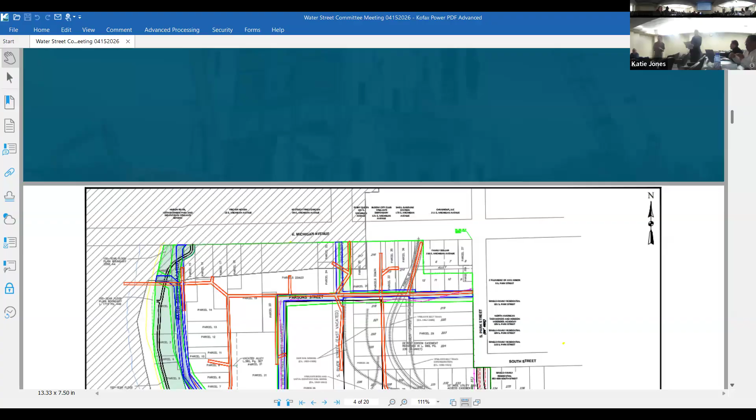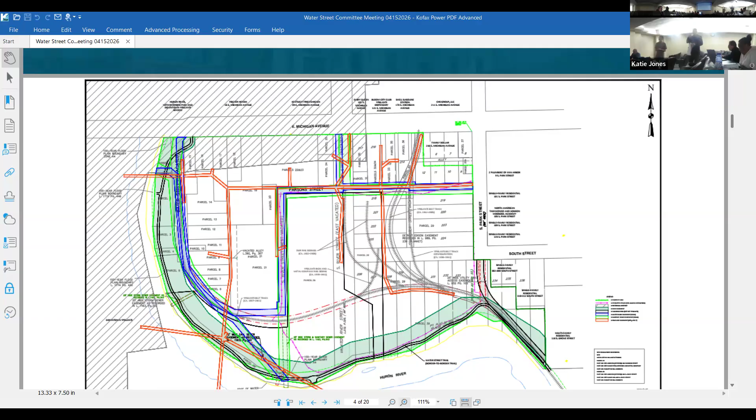I'll skip ahead a couple. The first set of maps is about the existing conditions at the site. We all know the site's not developed right now, but it had previously been developed since at least the 1880s up until 2010. So there are certain infrastructure features that are still on site related to past use of the site.

I guess we'll start with the park easement, along the river. That is a 100-foot wide easement that includes the portion of the Border-to-Border Trail that goes through Water Street. It's the big, green thing at the bottom. It's the city's intent to retain ownership of the park easement, so it's not going to be part of the development area. It's about 6 to 7 acres in size. The current parcel for Water Street is about 37 acres, so the redevelopment area at Water Street is actually about 30 acres.

The other things you see on this map are both above ground and underground easements. On the projector, the easiest thing to see is the blue, that's a water main easement that crosses the site. It tends to follow old street rights of way that have since been vacated. In a similar location, there's also a sanitary sewer easement, shown in a different shade of green, and the park easement. Up in Parsons Street, the depth of the sewer easement is about 20 feet underground, so it's quite deep, pretty well integrated into the site.

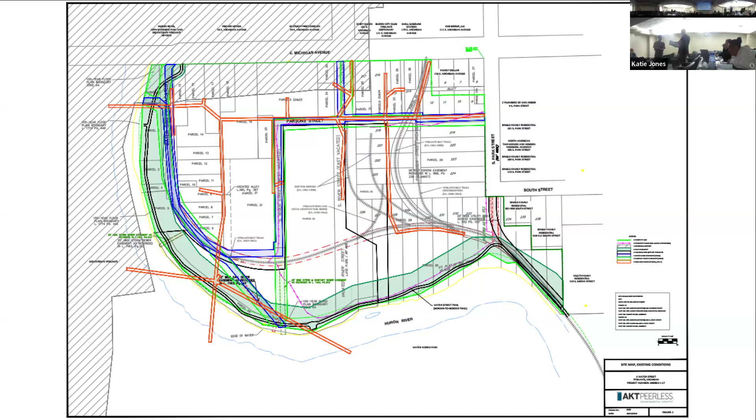There's another question: is there any evidence of buried storage tanks in any of these parcels? Yes, there have been storage tanks encountered on multiple parcels. I believe a storage tank was identified on parcel one in connection with demolition of the former structure there. Parcel 16 had a bunch of tanks on it. But to answer your question, yes, there have been a lot of storage tanks.

I think we've done that, yep.

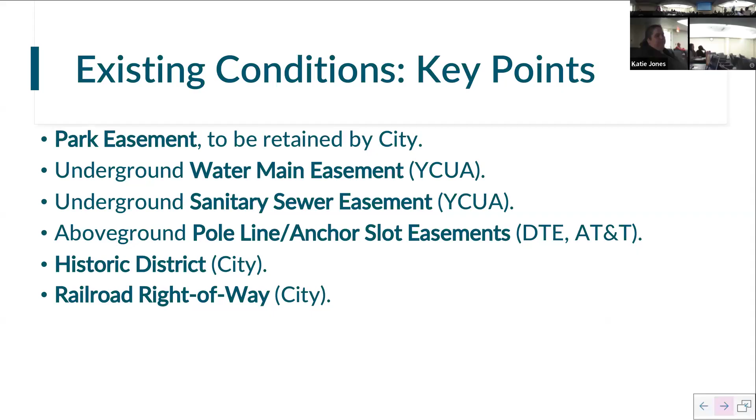So the question earlier about the significance of the former parcels, it's difficult to see on the projector, but on the ground, that form map you have in front of you is a different version of that map. When the city went to acquire the Water Street redevelopment area, those 39 or 40 different parcels, the city did its own due diligence, phase ones and phase twos on most of the parcels, based on the historical use.

Everything shaded brown or light brown is called a Part 201 facility, a site of environmental contamination. The city went to phase one, then phase twos, identified contamination, and filed a baseline environmental assessment. Subsequent work identified additional contamination on different parcels that also meet this definition of a Part 201 facility - those are the tan shaded parcels. Then parcel 16 up along Michigan Ave is shaded red. That's a Part 213 property, or a leaking underground storage tank site.

So to your question a moment ago, multiple underground storage tanks were removed from parcel 16. A cleanup was conducted, called the BTEX area, back in 2004. The intent of that cleanup was to remove highly concentrated petroleum contamination, in the interest of simplifying soil management decisions for a prospective developer at the time. It wasn't done through Part 213, it was done under Part 201, which is environmental contamination, whereas 213 is underground storage tanks.

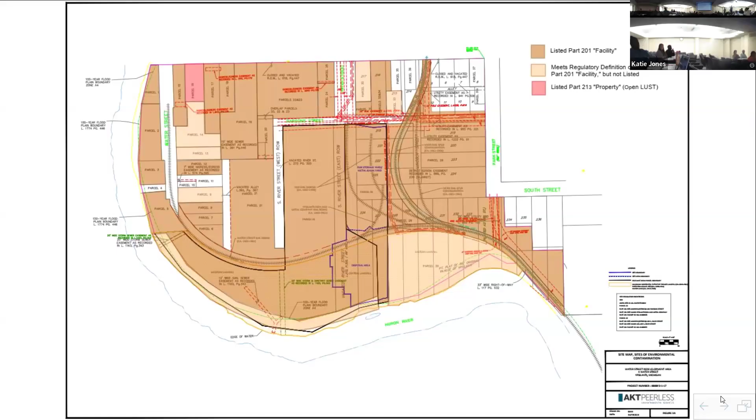But generally, back to this map, it's just intended to demonstrate the whole site. It's essentially a Part 201 facility, so a developer will have soil management obligations, and for the end use to take care of.

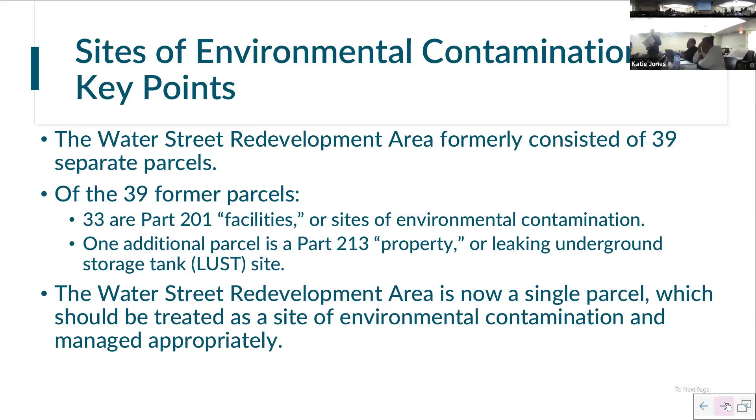To go slightly deeper, the soil management means developers would not just excavate for foundations in a normal fashion - they'd have to do constant testing, even though some has been remediated. They have to be paying attention because of course you didn't remediate it 100%, and you don't know where they're going to be digging. As they dig stuff up, it could still be contaminated. Does that not slow them down?

The site is likely going to be regraded as part of the redevelopment. The whole site is contaminated. Multiple cleanups have been done at the site to get rid of the worst of the worst.

And what I was alluding to earlier with respect to simplifying soil management decisions - early on, the first proposed redevelopment, say in the early 2000s, when a developer goes to do what they're going to do, it becomes cumbersome if we have to treat different areas differently. We don't want to spread very high levels of contamination into areas that are less contaminated, so that's why some of those cleanup activities were conducted. Generally speaking, on a contaminated site, if the contamination across the site is relatively similar, there's really no restriction against moving dirt around within the facility footprint.

How deep can you move the soil in? It depends on what you want to do with this. Activities that disturb the soil, any building that gets put in there could go to either virgin soil, that is undisturbed, or down into where many of these contaminants go. The developer needs to know what foundation solutions make sense, and therefore what soil he's displacing, and whether he's testing soil, because he's displacing contaminated soil that was left on the ground. But you get the point.

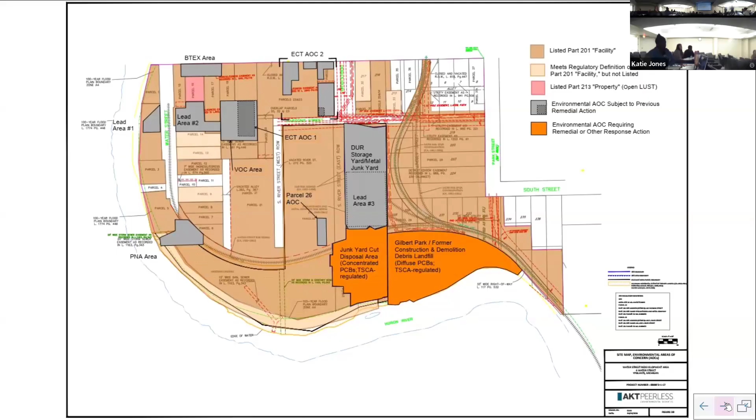For clarification, as I understand it, all the areas from that soil—there's not a restriction for mixing that. But if you get into the gray areas, you need to keep the soils within the boundaries of those areas. Sorry, it's actually kind of the opposite.

The gray areas are areas that have been cleaned up—excavations where clean engineered fill has been put back. So what you wouldn't want the developer to do is take soil from the brown areas and move it to the gray areas, at least without putting plastic sheeting down underneath it, because those gray areas are now backfilled with clean material.

To zoom out a bit, a developer should have a good, solid environmental construction management plan about what they can, or what they should or shouldn't do with their concept.

One slightly complicating issue not shown on the maps yet is there are low-level PCBs on certain parts of the site. They're not TSCA regulated, so it's a Part 201 issue, and we're still working through the data to make a recommendation. Parcel 26 was an auto parts manufacturing facility at one point. There are low-level PCBs, maybe related to transformers used on site, or maybe related to oil used as a dust suppressant on an unpaved parking lot back in the day. They are well below 50 parts per million, but some spots may have PCBs above 4 parts per million, which is the state's direct contact cleanup criterion.

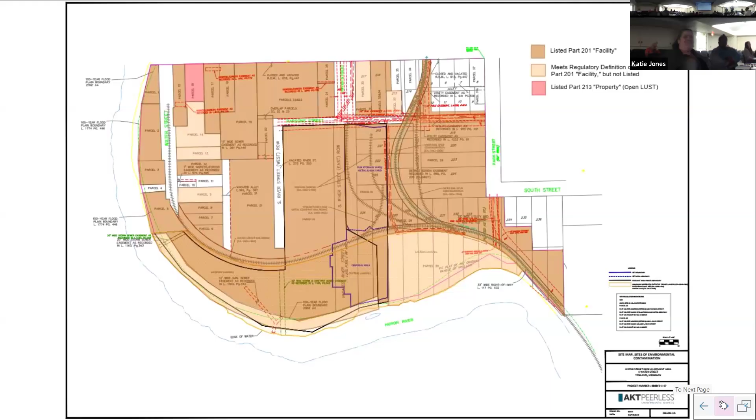Another thing we want to let developers know is this site formerly had more than 100 buildings on it, mostly north of the rail. All those structures have been demolished. Some of those structures had heating oil tanks underground, some had petroleum tanks underground, and some had petroleum tanks above ground. There are old fire insurance maps that depict water cisterns under some of the streets.

When a developer digs into a brownfield site like this, they are going to find foundations, footings, tanks, abandoned utilities, cisterns, and additional pockets of contamination that were not previously identified. So a developer needs to have experience working on these kinds of sites so they know how to handle those kinds of things when they encounter them.

It's gonna happen. Yes, it is. Yeah. What's that? What about? Oh yeah, thanks.

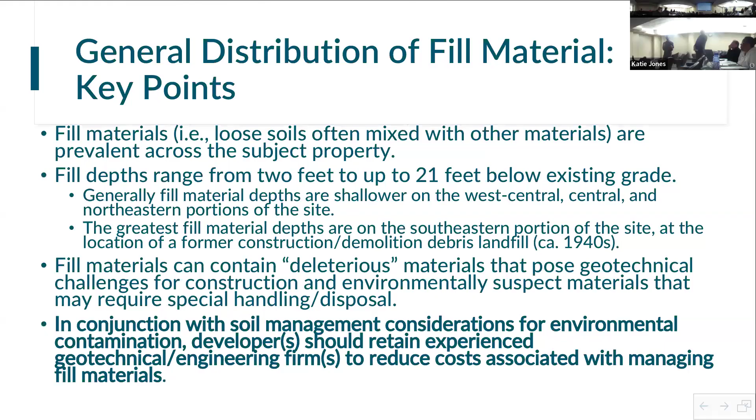I can also email this presentation out to you guys. This information is based off of, I think, over 200 soil borings, both environmental and geotechnical, and it depicts the thickness of fill material at the site. Fill is, generally speaking, loosely consolidated materials that people put there, and is often mixed with other materials like glass, brick, concrete, wood.

So what this map shows is there is a lot of fill material on the site. There's a legend that's not easy to see on the screen. The first color, which is 0 to 2 feet of fill, is not even on this map. So generally speaking, there's 2 feet or more of fill material across the site. The lighter the color, the shallower the fill; the darker the color, the deeper the fill.

We talked about the southeastern part of the site being a construction demolition debris landfill back in the 40s and 50s. That's also where the fill material is the thickest. It would be more expensive for foundation purposes to put structures there, because you have to drive piles down 30 feet into the ground to support the structure you want to build above. So it's very important for a developer to have an experienced geotechnical and engineering firm on board to find cost-effective solutions to building foundations based on the variable thicknesses of fill on the site.

From an incentives perspective, there's reimbursement through tax increment financing for fill-related items, and a site like this is common and eligible. These are typical of brownfield, old sites where we see fill all over the place. Essentially, debris back in the day was brought onto sites from all over the place. For example, in Detroit, all houses demoed generally were just dumped right into the site, into the basement hole. So it's not uncommon for brownfield sites, or brownfield developers, to adjust for it.

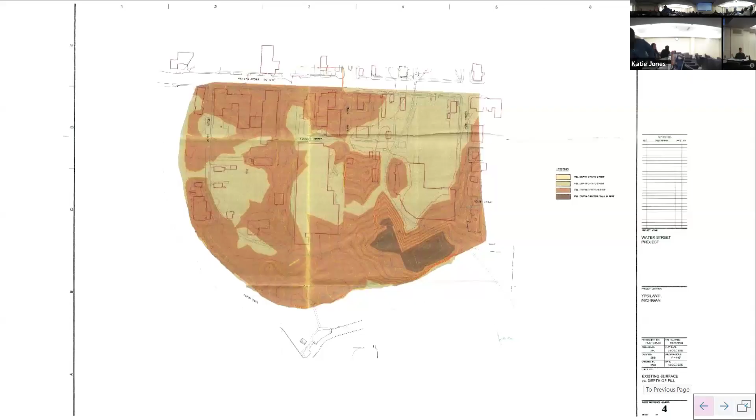One follow-up question. You described malls as a brownfield site as well. Yep, brownfield is a blanket term. The EPA defines brownfield more as a contaminated site, but Michigan defines brownfields as a variety of items—it's more of an economic development definition. Over time, programs evolve. Brownfields in Michigan, to allow tax increment financing to reimburse eligible activities, used to just generally mean functionally obsolete, blighted, and contaminated. Over time, those definitions expanded to include historic and transit-oriented development, and most recently housing property is eligible for tax increment financing to reimburse eligible activity. So yeah, it's really an economic development term.

You said there are pre-development funds—ground penetrating radar exists and probably helps show foundations, tanks, and other things people would encounter. Is that cost prohibitive? That would be more on the developer side. Given all this information, they'd make the call during due diligence on the pre-development side to do a GPR check for tanks. At this point, from the city's perspective, I don't think it's necessary or cost effective to do so. It's really on the developer side, but yes, that's an option.

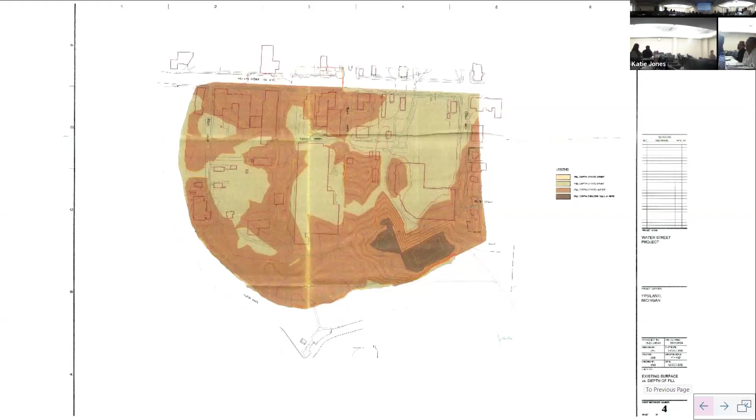Football. Can I make a comment from the public on what he just said? Unfortunately, no. Thank you, guys. Thank you.

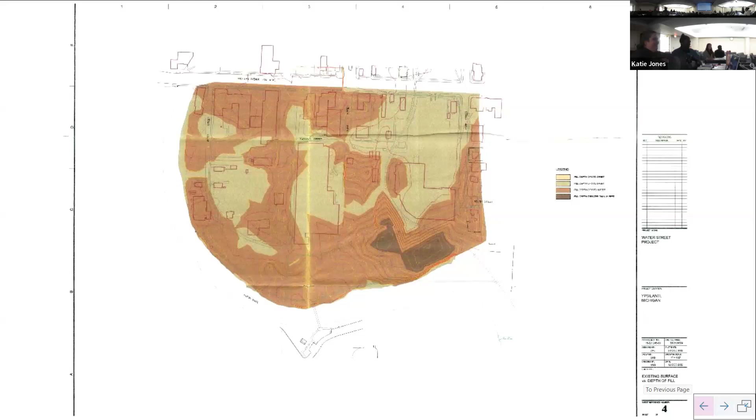Okay, so next we have the RFQ discussion, and we're going to cover the introduction through page 7, which is the environmental plan.

Now we're blind. People are falling asleep here. Can we turn it up? There's nowhere to fall asleep, it's so cold in here. You can't fall asleep as cold as it is.

I'm not trying to put a wrench in things, but just to name that, one of the reasons we wanted an extra meeting was partially to get a sense of what each person wanted to bring, what is most important to us as we think about this process. I think we had talked about going through here and that it would come out, but now I'm concerned about our timing and what we have left. So I'm wondering if we should do a different process before the next one, because I can't do another meeting for that. Is that making sense? I thought that was one of the main reasons we wanted to get together today, to get a sense of that before we meet with council.

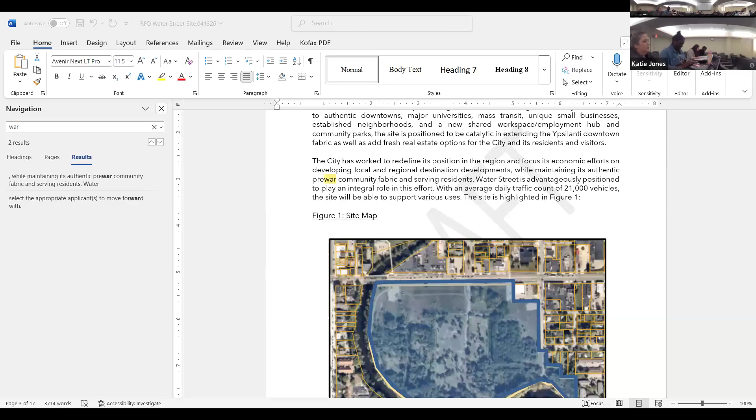No, nobody's listening anyway, so. Again, he said it, so now people listen.

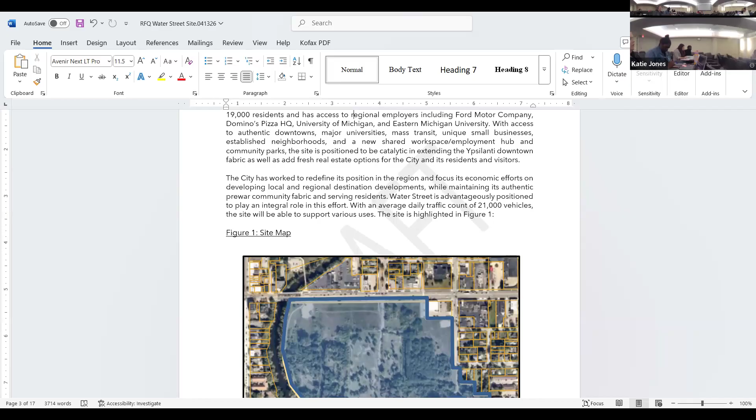So are we saying we need to edit this part to be more specific about World War II? Or that we are prioritizing building and design of the pre-war stuff, which is pretty World War II? I think just being specific would be good.

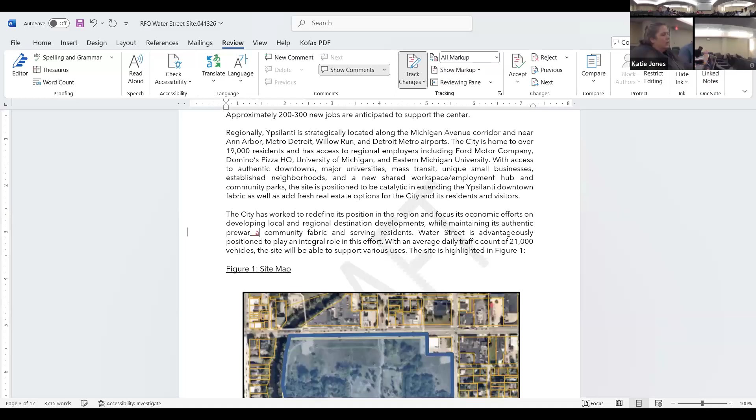Yeah, so where am I adding the word architecture? Well, maybe where it says pre-war architecture, or pre-war architecture and community - I don't know what was meant there with the word community development, other than...

Maintaining authentic pre-war architecture and diverse community - authentic pre-war architecture and diverse architecture, also community architecture. I don't know how to...

Are we trying to find a different way to emphasize the wording, to make sure that our past... so that somebody doesn't go in and develop ugly row houses or garages or that's something else. I think it's authentic pre-war architecture, comma, community fabric, and serving its residents.